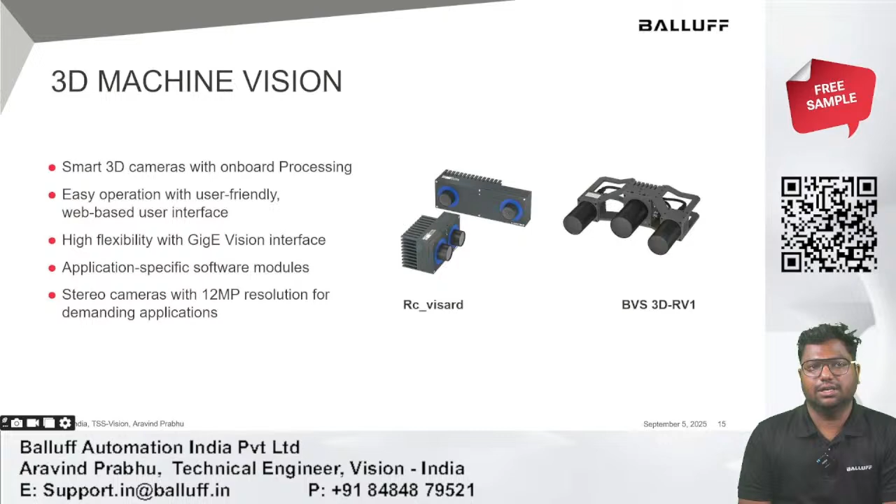Here we can see some of the technical specifications of Balluff's smart 3D cameras. They are available with different base distances, 65 mm and 160 mm, to cover various applications. The lenses come with a focal length of 4 mm or 6 mm depending on the required field of view. In terms of resolution, the camera captures at 1280 by 960 pixels, giving us over 1.2 megapixels per image.

The field of view ranges from 61 by 48 degrees for wider coverage to 43 by 33 degrees for more focused applications. The depth measurement range goes from as close as 20 centimeters all the way up to 3 meters, with depth resolution as precise as 0.04 millimeters in certain configurations—that's sub-millimetric accuracy. Importantly, these cameras are available in both monochrome and color versions, so customers can select the option that best suits their application.

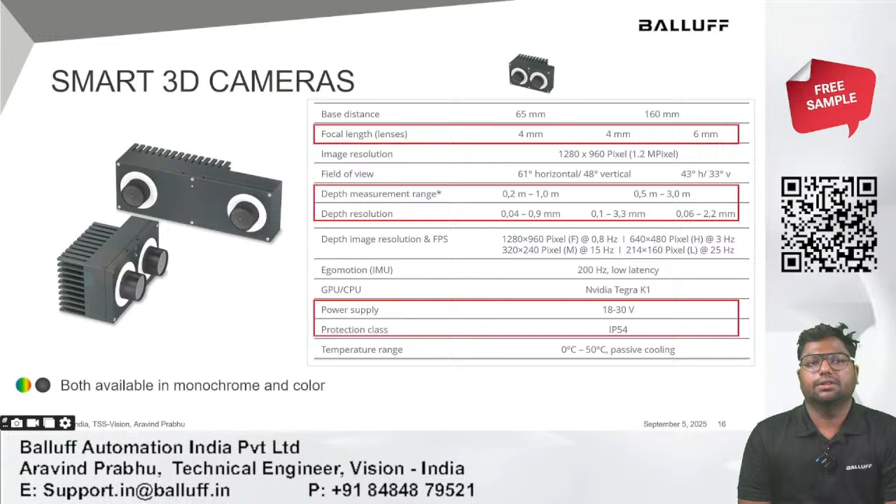Here you can see the field of view of our 3D camera modules. On the left, the BVS003Y, BVS0047 models designed for shorter working distance at around 200 to 500 millimeter range.

They can capture small areas with high detail, making them ideal for close range inspection or precise robotic guidance. In the middle, the BVS004K, BVS004Y models provide a balanced field of view, covering both mid-range and large areas

up to 3 meters. They are great for general purpose applications where flexibility is important. And on the right, the BVS0057 model, this camera is suited for wide working areas, capturing larger objects or bins.

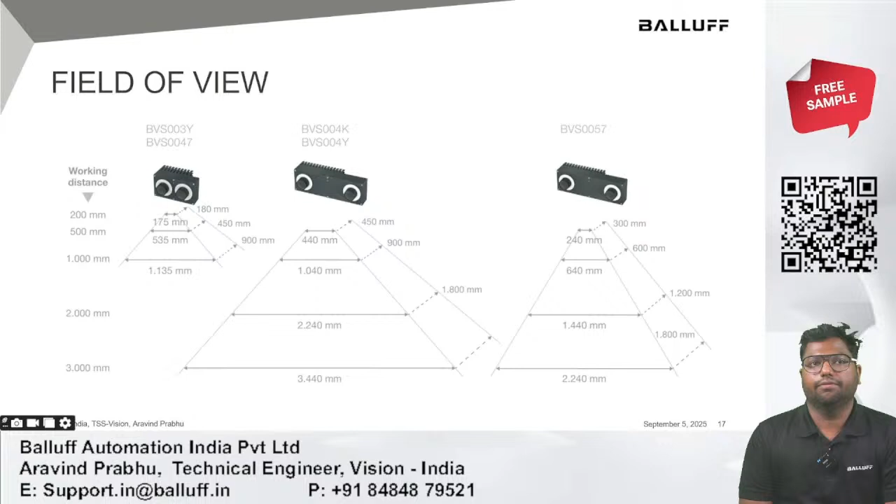It allows detection across 2 to 3 meters, which is especially useful in logistics, warehouse automation, or palletizing tasks. So depending upon the application, whether it's close-up precision or wide area detection, Balluff offers the right camera with the right field of view. So here we see our stereo camera options.

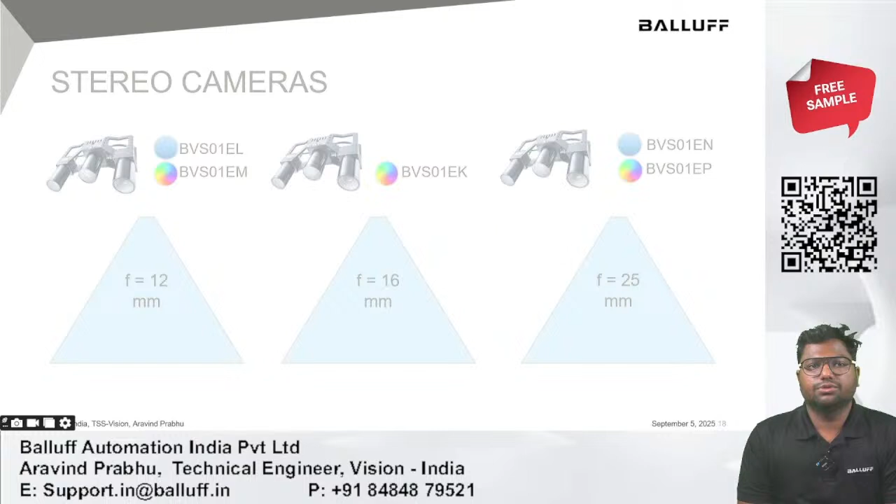So next, this diagram shows how the field of view expands as the working distance increases. At 500 mm, the camera covers about 320 mm width, and at 1000 mm it expands to around 670 mm, and at 2000 mm the coverage grows to over 1.5 meters, and at 4000 mm nearly 3.3 meters wide.

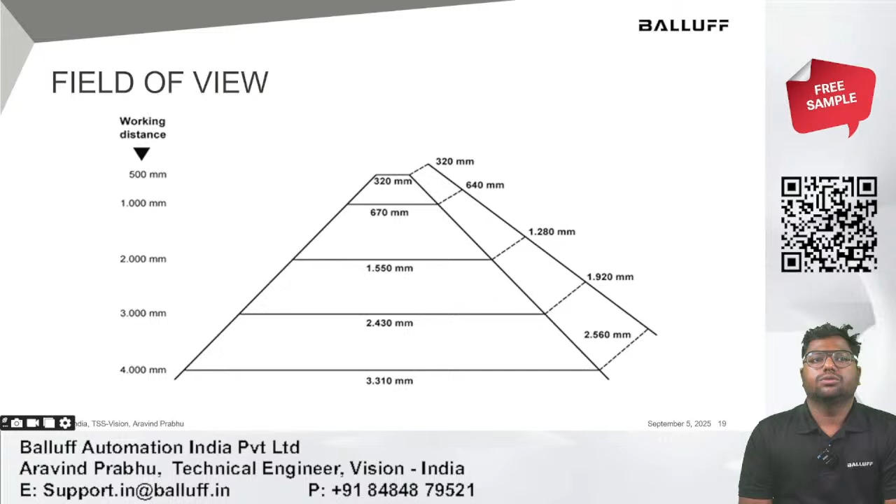This flexibility means the same camera can be used for both close-up precision and large area detection, simply by adjusting the working distance. So next, this table shows how different camera models and lens options impact the field of view,

resolution and depth accuracy. Our 1.2MP cameras with 65 mm, 160 mm baselines are suited for standard applications, balancing field of view and resolution. The 12MP 3D RV1 camera with higher pixel density and longer baseline delivers exceptional precision with depth accuracy as fine as 1 millimeter, even at longer working distance.

In simple terms, the calculator helps match the right camera setup to the application's accuracy and coverage needs.

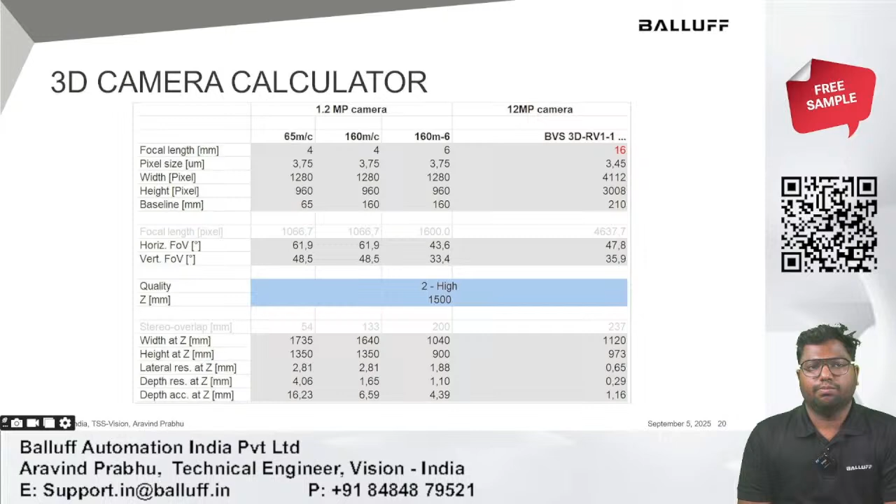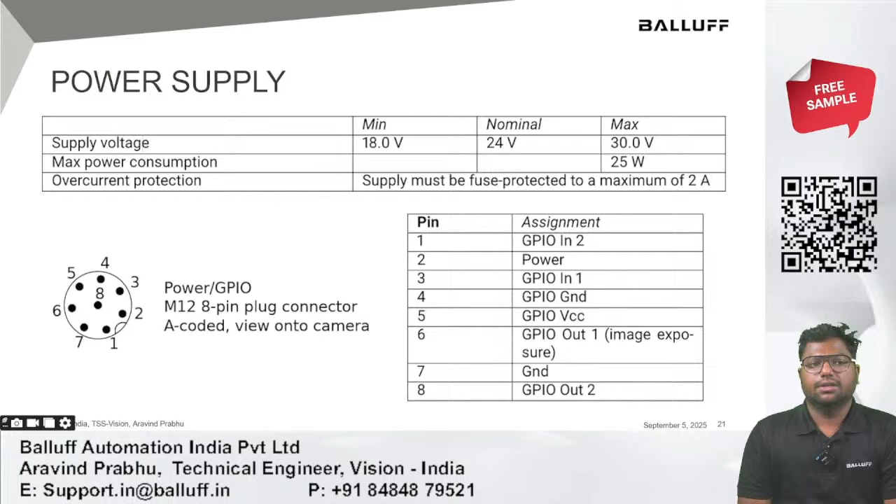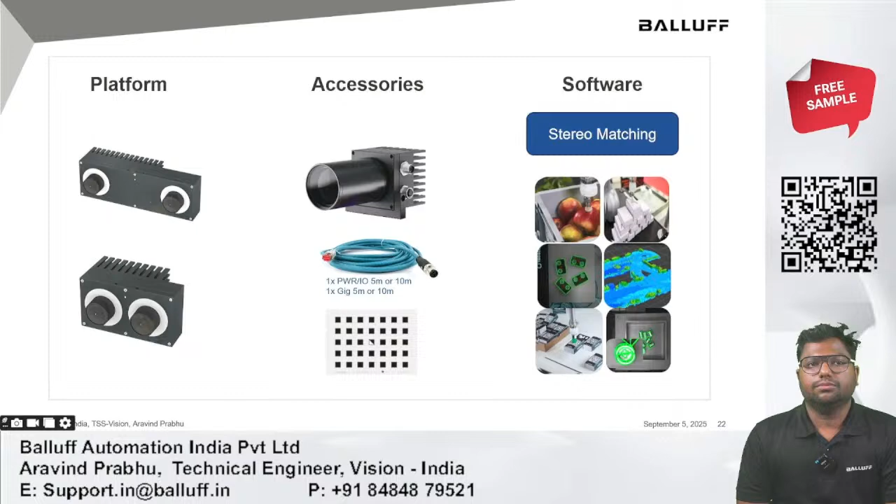So the typical calibration error is below 0.2 pixels. If the error is in that range, then the calibration procedure can be skipped. If the calibration error is greater, the calibration procedure should be performed to guarantee full sensor performance.

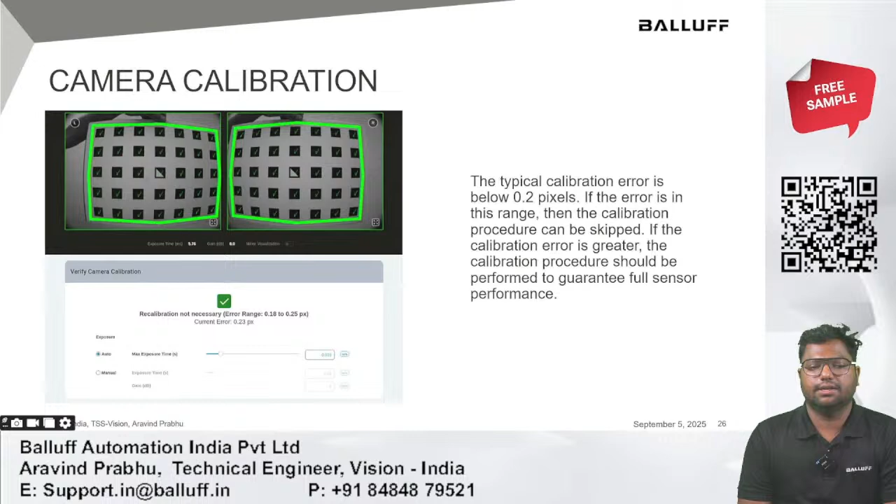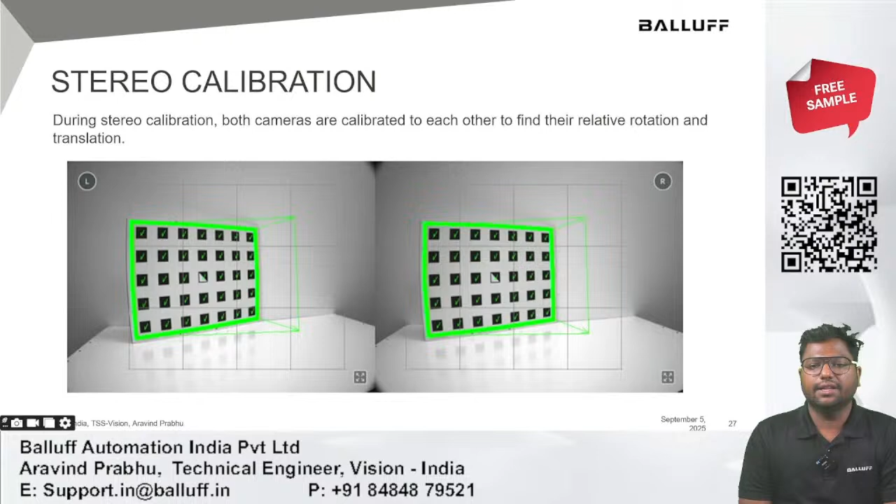So here we have stereo calibration. During stereo calibration, both cameras are calibrated to each other to find the relative rotation and translation.

Next, the grid must be kept very still for detection. If motion blur occurs, the grid will not be detected. All the grid cells that are drawn onto the image have to be covered by the calibration grid. This is visualized by filling the covered cells in green, as you see in the picture.

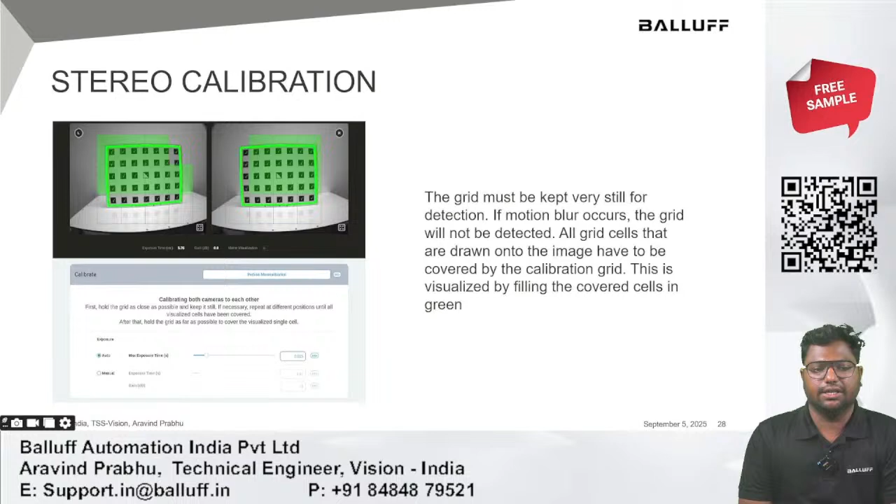So next we have a small video about calibration techniques. Let us have a look at the video.

In this we have a calibration grid option, large grid 0.39 by 0.27 meter range. We'll click on next. We can see the grid in the background, highlighted in green.

Now the process is carried on. You can see the grid in the background, adjusted to cover all the green highlighted areas. So you can adjust the camera so that left and right can both cover it.

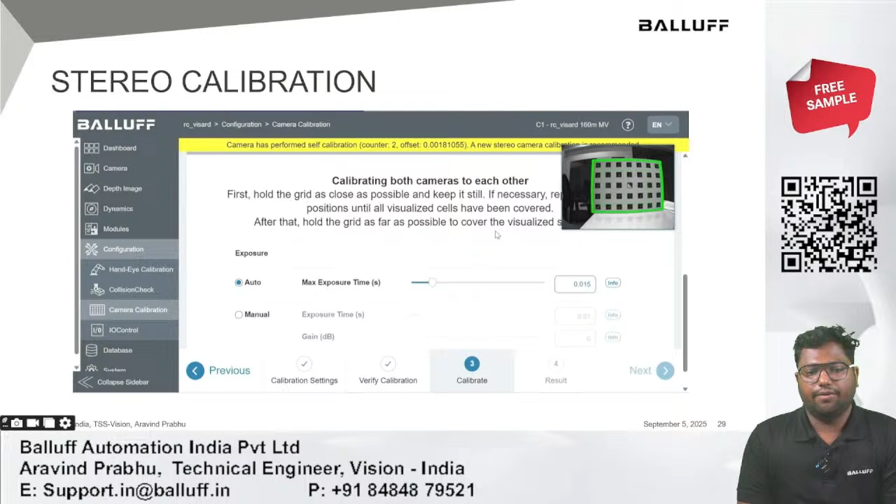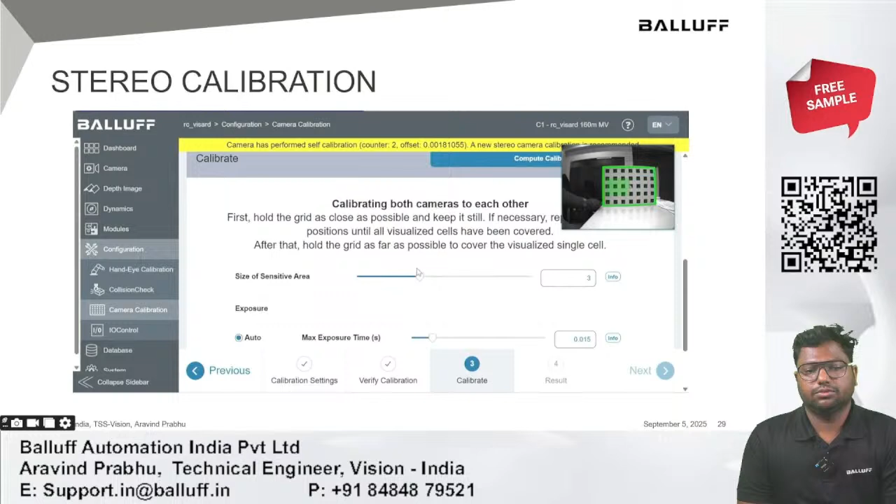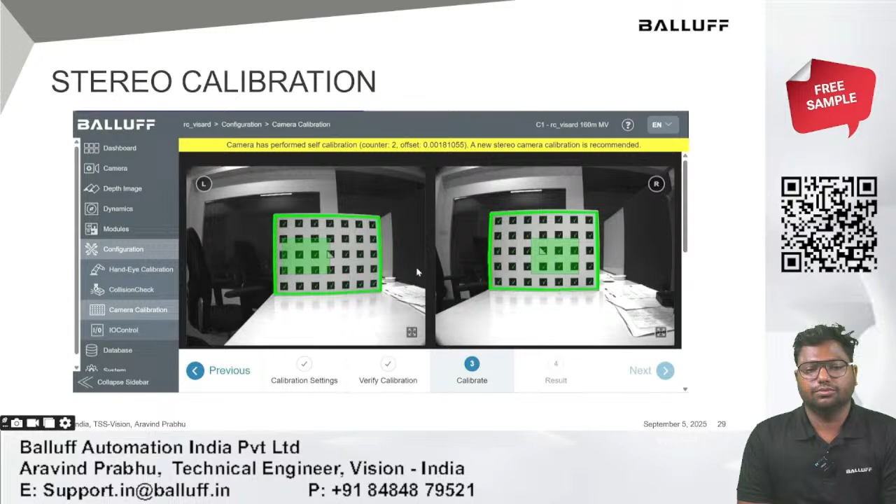We have to keep the grid as far as possible to cover the entire grid. Now we move the grid as far as possible. We can check the exposure, auto exposure range, time - everything will be perfect. Now we further move backward.

Now we can see that it is overexposed, so we can adjust the exposure to sit in the right position. We'll adjust the camera. Now it covers the entire grid.

Now we have an option, compute calibration. So the calibration is done, and you can save. Calibration finished, press save to apply. The value is between the range.

The calibration is finished and parameters are stored. It will completely save, and the calibration is saved permanently. We don't need to carry it again.

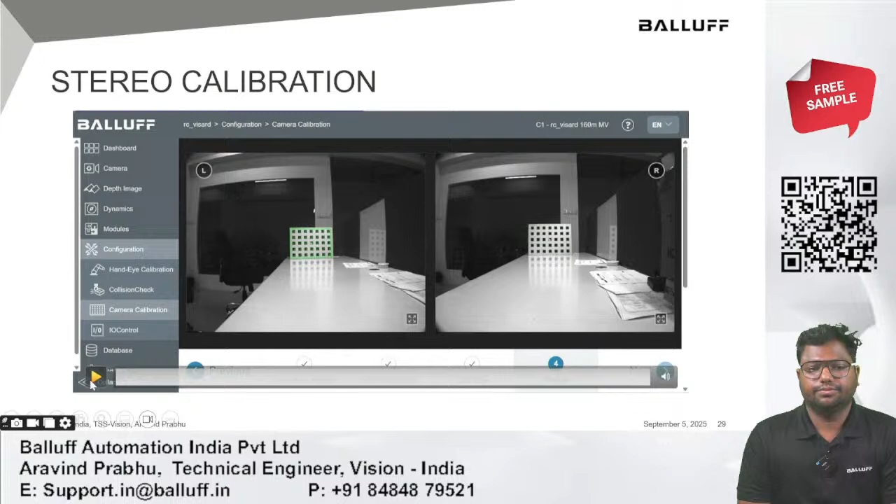Now mono calibration. Mono calibration should only be performed if the result of stereo calibration is not satisfactory.

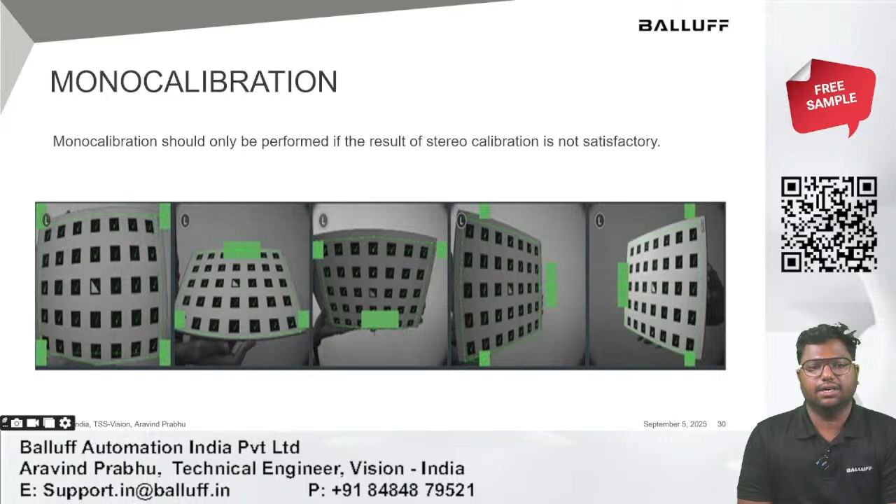Stereo data processing results. Let us take a look at the result of stereo data processing - the transformation from a basic 2D image to a fully reconstructed 3D model, all enabled through advanced stereo vision technology.

Starting on the left, we have the 2D camera image, which captures a standard grayscale visual of the object in the bin. Next, the depth image provides a color-coded map indicating how far each point is from the camera. Notice the gradient from blue to red, representing near to far objects.

Then we have the confidence image. This tells us how reliable each depth measurement is - brighter areas mean higher confidence. This is crucial for downstream applications that rely on precision.

Finally, the 3D reconstruction with sub-millimetric accuracy - we are able to generate a highly detailed and accurate 3D model, which is essential for tasks like bin picking, inspection, and robotic automation.

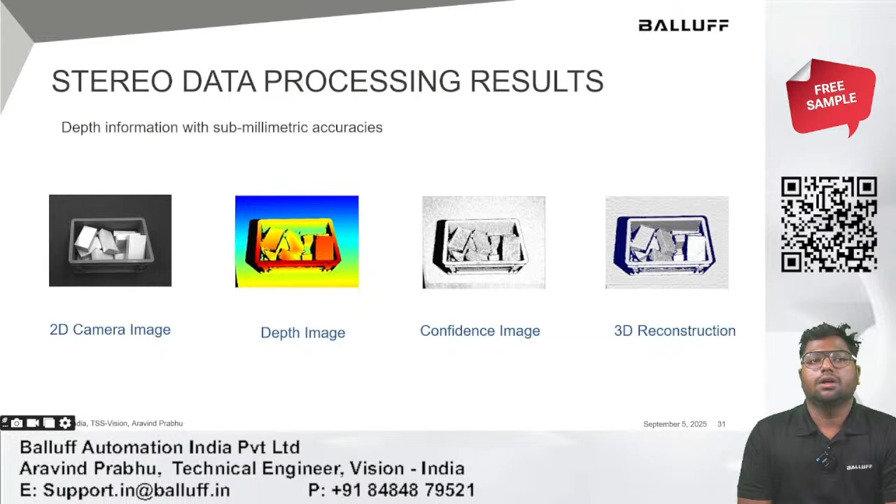Next, let us explore how we go beyond basic imaging. What you are seeing here is not just a stereo camera, it is an integrated system that combines image acquisition with onboard pre-processing. At the core is the NVIDIA Tegra K1, enabling powerful edge computing.

The system also supports point cloud generation, visual inertial navigation, SLAM for real-time localization, and compatibility with GenICam and GigE Vision standards. The stereo camera does not just capture images - it extracts depth, motion and position information all in real time.

On the right side, we see application-specific tools in action, from fruit sorting and bin picking to inspection and quality control. These solutions are already being deployed in industries like agriculture, logistics, and manufacturing.